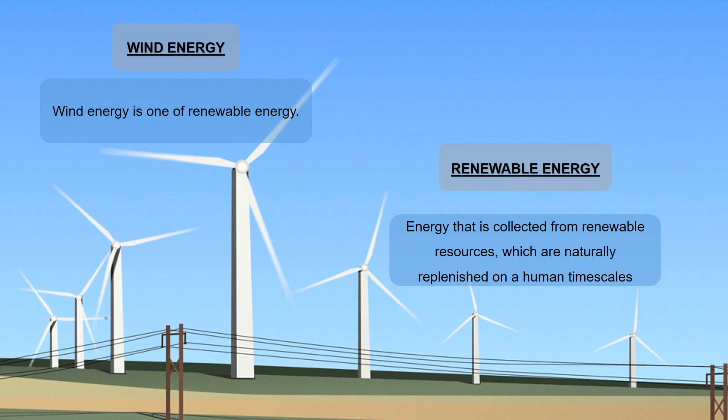In my video, I would like to talk about what is wind energy and what makes wind. As we know, wind energy is one of renewable energy. So what is renewable energy? Renewable energy is energy collected from renewable resources and it will replenish naturally on a human time scale.

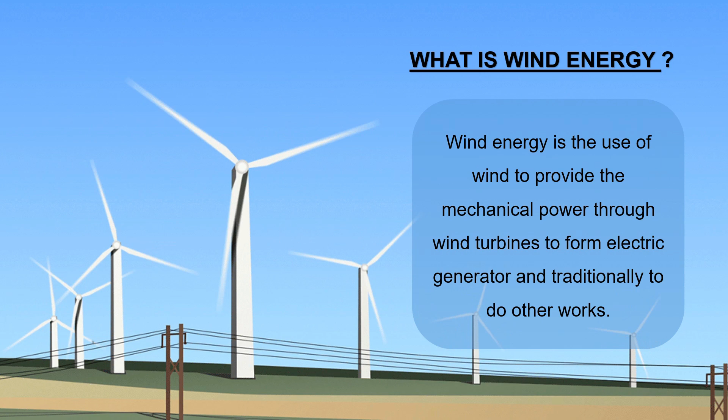So what is wind energy? Wind energy is the use of wind to provide mechanical power through wind turbines to form electric generators, and traditionally to do other works such as grinding grains and pumping water. It consists of many individual wind turbines connected to the electric power transmission network.

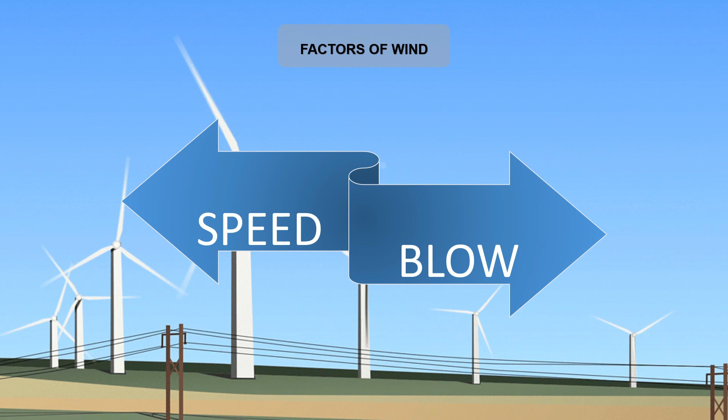Wind is the air in motion produced by the uneven heating of the Earth's surface by the sun. The sun shines on land and water, and the land heats up faster than the water. Because of that, warm air on the land will rise, while cool air over the water will move in and replace the rising warm air. Two factors necessary for specific wind are speed and blow direction.

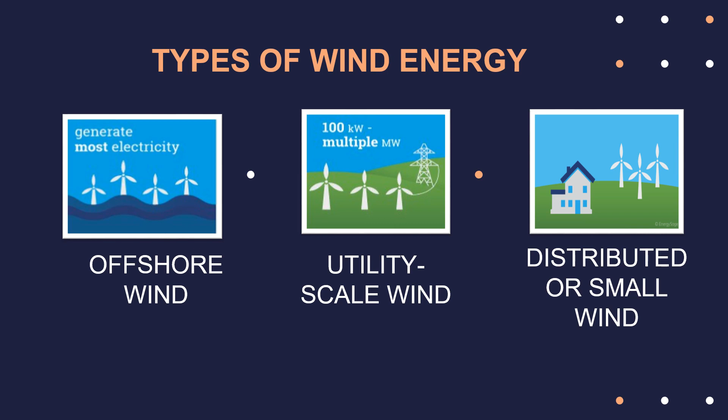Hello, Assalamualaikum. My name is Siti Nur Atiqah. Next, I would like to explain about three types of wind energy, which are offshore wind, utility scale wind, and the last one is distributed or small wind.

The first type of wind energy is offshore wind. Offshore wind power or offshore wind energy is the use of wind farms constructed in bodies of water, usually in the ocean, to harvest wind energy to generate electricity. Offshore wind is an abundant domestic energy resource that is located close to major coastal load centers.

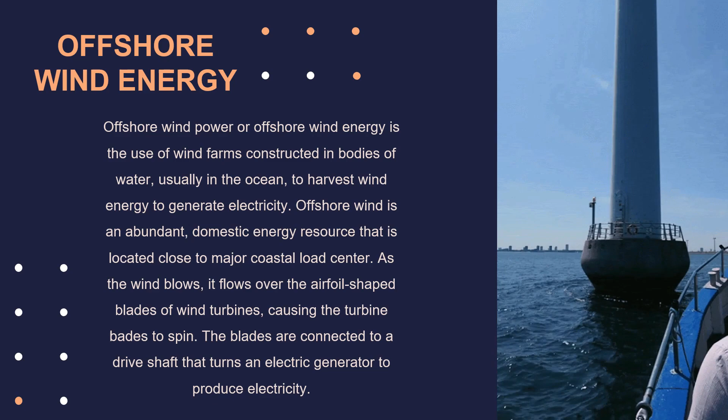As the wind blows, it flows over the airfoil-shaped blades of the wind turbine, causing the turbine blades to spin. The blades are connected to a drive shaft that turns an electric generator to produce electricity.

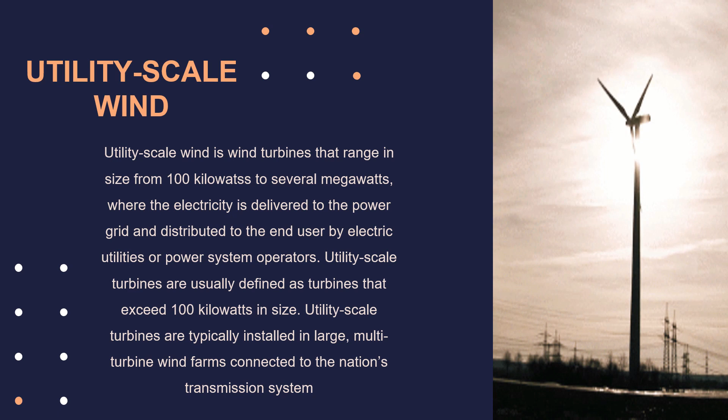The second type of wind energy is utility scale wind. Utility scale wind is wind turbines that range in size from 100 kilowatts to several megawatts, where the electricity is delivered to the power grid and distributed to the end user by electric utilities or power system operators. Utility scale turbines are usually defined as turbines that exceed 100 kilowatts in size. Utility scale wind turbines are typically installed in large multi-turbine wind farms connected to the nation's transmission system.

The last one is distributed wind. Distributed or small wind is defined as single small wind turbines below 100 kilowatts that are used to directly power a house, farm, or small business and are not connected to the grid. Distributed wind energy systems offer reliable electricity generation in a wide variety of global settings, including households, schools, farms and ranches, businesses, towns, communities, and remote locations.

Now I would like to explain the applications that use wind energy. The first one is wind energy is used to propel sailboats in rivers and seas to transport men and materials from one place to another.

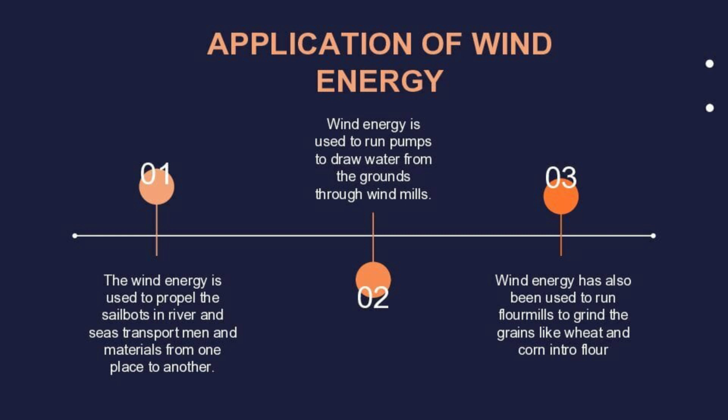The second one is wind energy is used to run pumps to draw water from the ground through windmills. And the last one is wind energy has also been used to run flour mills to grind grains like wheat and corn into flour.

Assalamualaikum warahmatullahi wabarakatuh. I'm Tengku Fatin Syafiqah binti Tengku Shahrir from AS1205L. So there are two types of wind turbine, which is firstly horizontal axis and second is vertical axis.

The horizontal axis is like the traditional farm windmills used for pumping water, and most large modern wind turbines are horizontal axis turbines. And for vertical axis, it's like the eggbeater-style Darrieus model named after its French inventor.

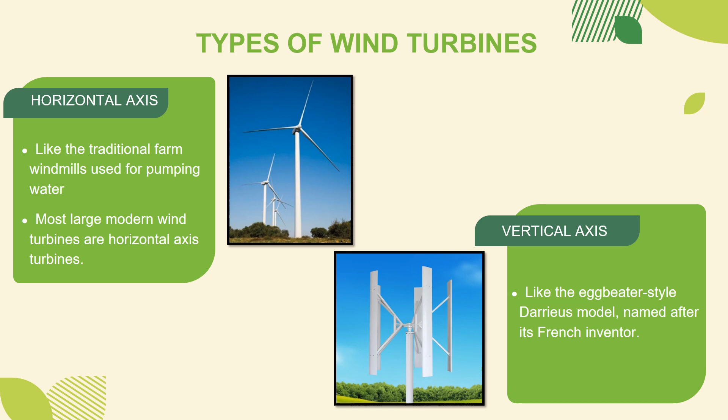Firstly, horizontal axis wind turbine. Horizontal axis wind turbines have the main rotor shaft and electrical generator at the top of a tower and must be pointed into the wind.

Small turbines are pointed by a simple wind vane, while large turbines generally use a wind sensor coupled with a servo motor. Most have a gearbox which turns the slow rotation of the blades into a quicker rotation that is more suitable to drive an electrical generator.

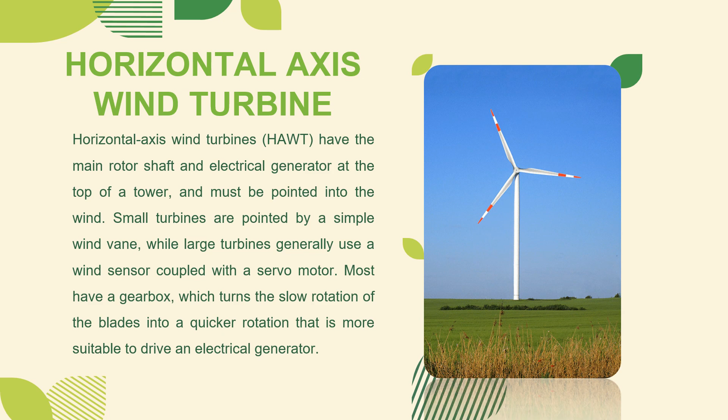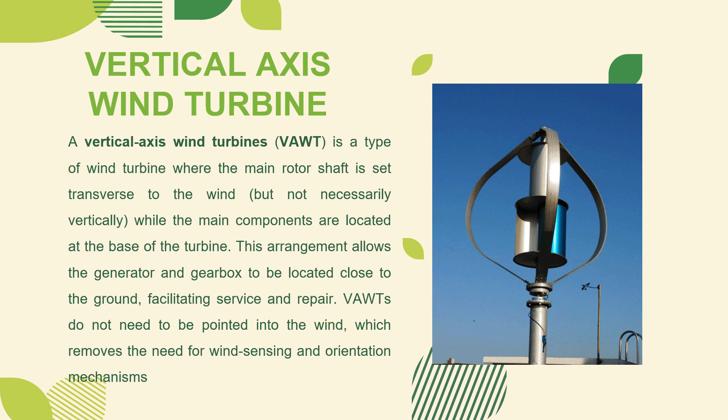Second is the vertical axis wind turbine. This is a type of wind turbine where the main rotor shaft is set transverse to the wind, but not necessarily vertically, while the main components are located at the base of the turbine. This arrangement allows the generator and gearbox to be located close to the ground, facilitating service and repair. Vertical axis wind turbines do not need to be pointed into the wind, which removes the need for wind sensing and orientation mechanisms. So next, how does a wind turbine work?

Wind turbine blades rotate when hit by the wind, and this doesn't have to be a strong wind. Most turbines will start turning at a wind speed of 3 to 5 meters per second, which is a gentle breeze.

It's this spinning motion that turns a shaft in the nacelle, which is the box-like structure at the top of a wind turbine. A generator inside the nacelle converts the kinetic energy of the turning shaft into electrical energy. This then passes through a transformer which steps up the voltage so it can be transported on the national grid or used by a local site.

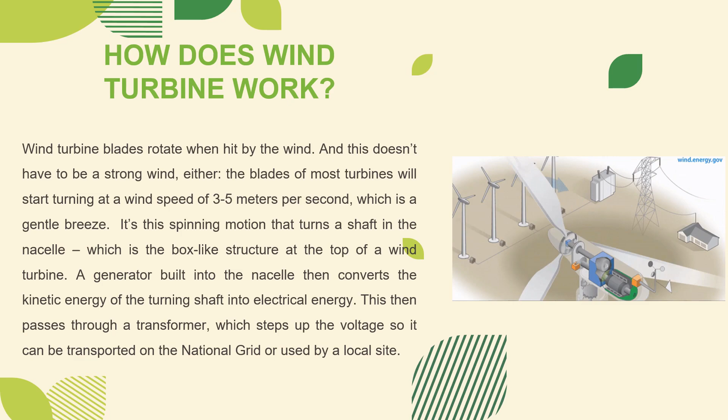There are so many advantages of the wind turbine, and one of them is that it's cost effective. Land-based utility scale wind is one of the lowest price energy sources available today because electricity from wind farms is sold at a fixed price over a long period of time, and its fuel is free. Wind energy mitigates the price uncertainty that fuel costs add to traditional sources of energy.

Next, wind energy is a clean fuel source that doesn't pollute the environment, unlike unrenewable sources such as coal or natural gas. These sources emit particulate matter such as nitrogen dioxide or sulfur dioxide that cause human health problems and environmental damage. Other than that, wind energy is sustainable.

As you know, wind energy is actually a form of solar energy. Wind is caused by the heating of the atmosphere by the sun, rotation of the earth, and the earth's surface irregularities. For as long as the sun shines and wind blows, the energy can be produced continuously.

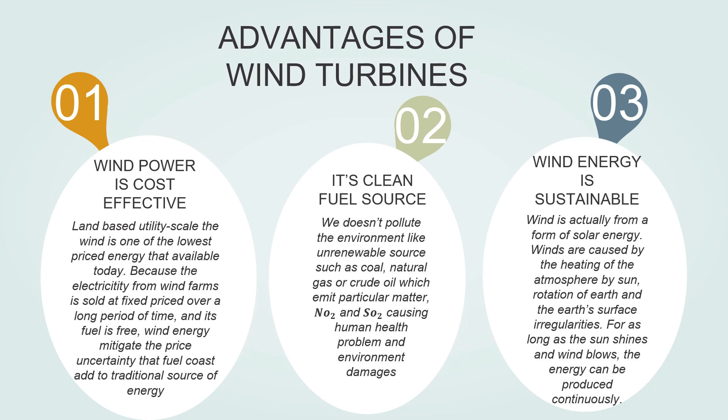The disadvantages of wind turbines: although wind turbines have a lot of advantages and benefits, they also have some challenges, or disadvantages.

Besides that, turbines might cause noise pollution or aesthetic pollution. For example, noise produced by the turbine blades might have a bad impact on the environment. Besides, concerns also exist over the visual impact on the landscape.

Lastly, the wind turbine or wind plant can impact the power system grid. So what is a wind plant? A wind plant is a group of wind turbines in the same place used to produce electricity. A power system grid is an interconnected network for delivering electricity from producer to consumer.